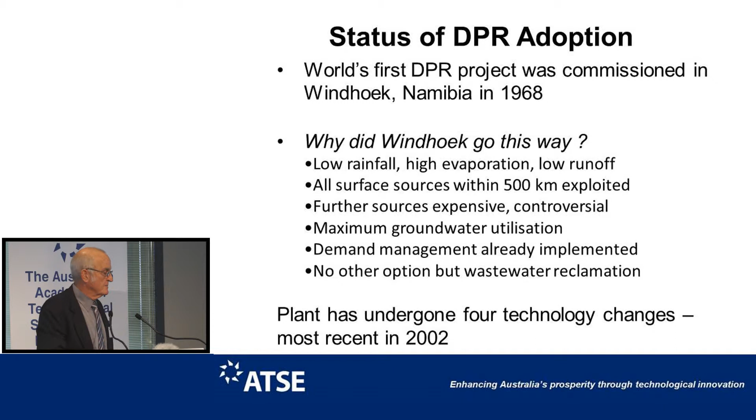As we all know, the first plant that was ever commissioned in the world called direct potable reuse was in Windhoek in Namibia in 1968. That was a fair while back. But let's put that aside and let's just have a look at why they did it. And a lot of this is going to sound very familiar to situations in part of our country. Low rainfall, high evaporation, low runoff. All surface sources within 500 k's had been exploited. Further sources were very expensive, and so it goes on.

I put it to you that those reasons why they embarked on that in 1968 apply to any of the other examples that I'm going to show you here, but it also gives good reason why, when we sit down to evaluate options for securing our supplies into the future, there's no reason why we should not consider an option that these guys did way back in 1968.

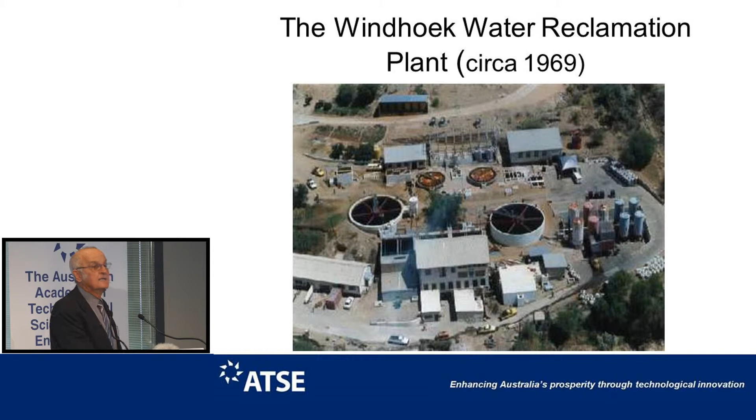I might add that since 1968, the technologies have changed. There's no way that today they would be able to use the technologies they had in 1968. That's just why it is so important we keep abreast of technologies, and why that report compiled by Stuart does address technologies that are used, and as Jörg has so eloquently put before us today, the technologies are here today, we can use them.

A pretty poor photograph of what the plant looked like in 1968. Actually a bit of a dog's breakfast, because it had just been added to in a very piecemeal fashion, but they produced a quality that complied with the standards at that time. In 2002, the new plant was commissioned with a lot of European money, operated by a European consortium, to very strict HACCP guidelines, very strict regulatory control, and has been going since that period.

As Stuart showed on his slide, it has 2 feed sources. However, we must remember that for 90% of the time, the quality coming from the dam is inferior to that coming from the wastewater treatment plant. And so it has been operating for 90% of the time on the effluent coming in from the wastewater treatment plant. That is just a function of Africa today, with people moving to live close to water supplies in a fairly uncontrolled manner.

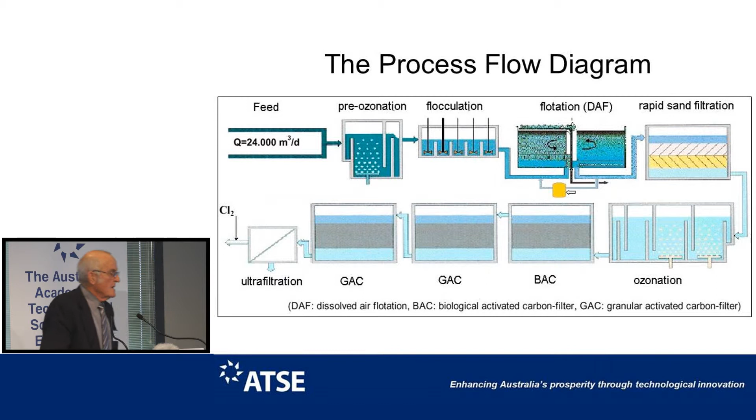There hasn't been much action in direct potable reuse since 1968, other than, of course, the Windhoek plant in 2002. But all of a sudden, there's been a real upsurge in discussion, talk, promotion. But as Carleen mentioned earlier, what has it actually achieved?

Let's look at direct potable reuse in the US. Cloudcroft, New Mexico, 2007, started up. Aurora, Colorado, 2010, started up. Big Spring, Texas, starting up. Wichita Falls, Texas, online due in 2014. Brownwood in Texas again. Why Texas? Texas is in dire straits in terms of water supply.

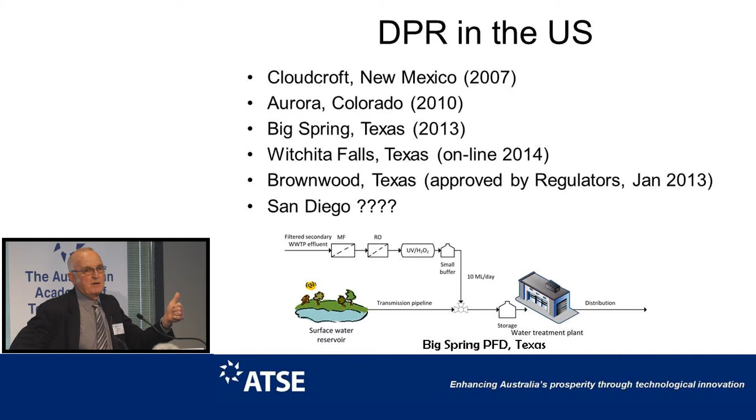And remember that in around about 1999, 2000, San Diego was going to go down the route of IPR, using exactly the same scheme that they are now currently demonstrating. And because there were council elections, the toilet to tap phrase was coined, and that's what killed it.

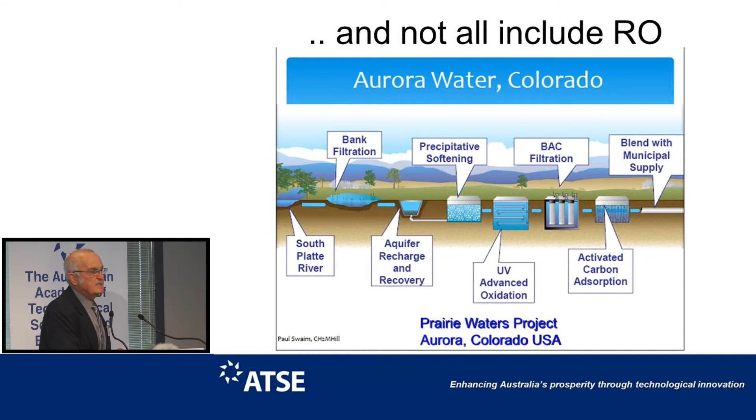Aurora in Colorado has come up with an interesting scheme. This one's been operating quietly under the radar. It doesn't have reverse osmosis. You don't have to have the high-end technology. The importance, though, is, as Jörg quite rightly mentioned, having multiple barriers of technologies that operate independently in an optimum fashion. Plus, as Stuart mentioned earlier, operators and managers who understand what this is all about.

In South Africa, yes, there has been a fair amount happening under the radar. Beaufort West in 2011, it's situated about 5 or 6 hours northeast of Cape Town in a very arid area and running out of water. What to do? They had to have a solution, and they went for the direct potable reuse route.

Durban, we've had some discussion from Stuart today on the fairly innovative way that they are managing their engineered storage basins in the direct potable reuse option. For those that don't know, Durban is a coastal city, and their water supply catchments, their raw water catchments are obviously inland. The cost of transporting effluent from the coast back there was just prohibitive. So they have looked at the direct potable reuse option.

Small coastal town, Hermanus, a very attractive place, excellent fishing. They've adopted their direct potable reuse design, and construction is to commence.

Cape Town, the mother city in South Africa, started looking at potable reuse way back in the early 80s, tried pilot studies, satisfied themselves with the performance of technologies at that time, shelved it, developed some more supplies, however, are now at a stage where they have reached a junction point. They've got a tipping point. Where do they get their water from? They've decided to go down the potable reuse option, looking at both direct and indirect, and the tenders were submitted in July 2013, and awards have still to be made.

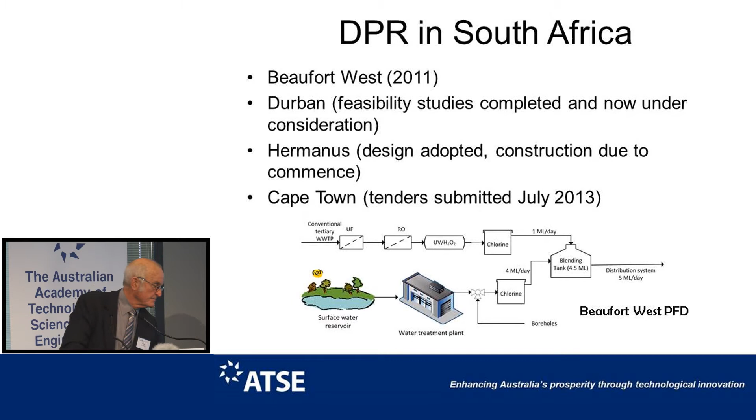In all of these, people often say to me as I go around, but you know, Windhoek, third world country, darkest Africa, really there's not a lot of community outreach, it just happens. The same comments are often made about what happens in Singapore. That's not the case here. There was a lot of community outreach in Beaufort West. They really did try and be transparent in what they were trying to do.

The interesting thing I find is that they actually called this Beaufort West New Water. And having worked with the Singaporeans, I'm sure they patented the term New Water. So maybe this is not a slide I show in Singapore. But the whole thing of transparency comes out there as well. So it's a very real exercise for them.

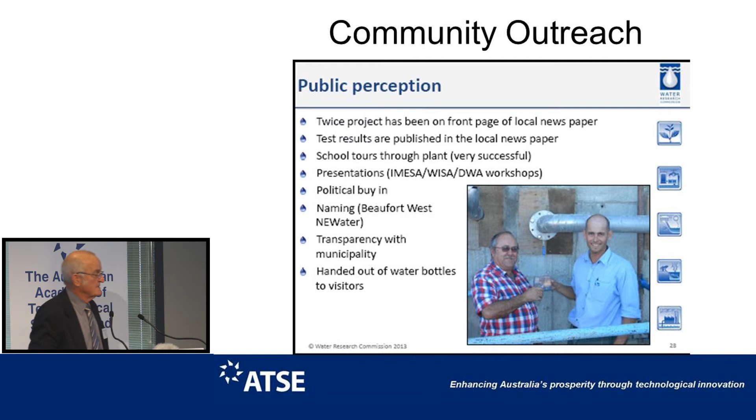India, direct potable reuse. For those that understand the rate of growth in India, the number of mega cities and growing number of mega cities in areas where there are not abundant water sources, they are looking at direct potable reuse. Two very good examples would be Delhi and Bengaluru, which is the new term for Bangalore. Direct potable reuse. Tenders are being called, they're all DBOOT projects, private sector involvement and operation, long-term operation. Tenders are being worked on at the present time and will be called in 2014-15.

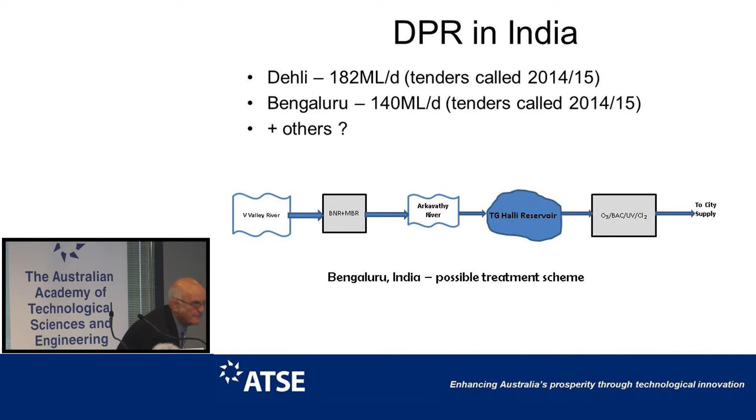Look at the treatment train at the bottom there. And that is a river which goes into a BNR plant, an MBR, which goes back into a river, then goes from there straight into a reservoir, and from there straight into an AWTP, but with no RO, with the ozone BAC option that we have a number of examples in this country of, and which forms the cornerstone of the Windhoek plant. They're going down that route. That's the design they are thinking of going out with the tenders.

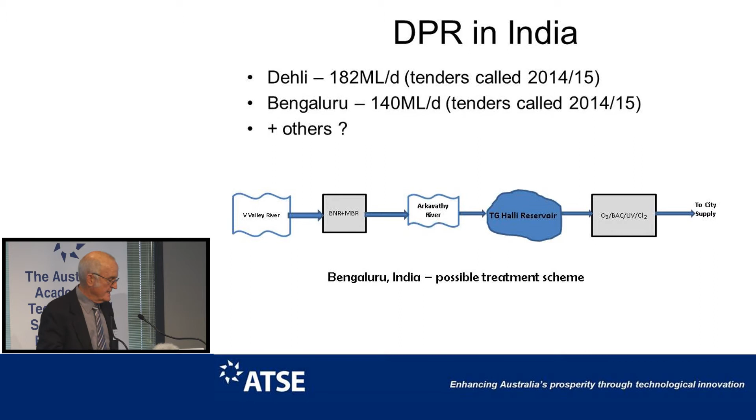We've touched on, or Stuart mentioned, the de facto or unplanned reuse, and I can remember participating in a direct potable reuse workshop at an IWA Leading Edge Technology Conference in Brisbane. I think it was 2011, with Jonathan Clement from PWN in the Netherlands, and after I sort of strutted my stuff about Windhoek and all this sort of stuff, he says, look, we've actually been doing direct potable reuse in the Netherlands for

about 50 years. We live, to coin the phrase, at the arse end of the Rhine River, and the quality of the water is seriously compromised. It's far more contaminated than today's secondary effluents. So that's their water supply. That's their raw water source.

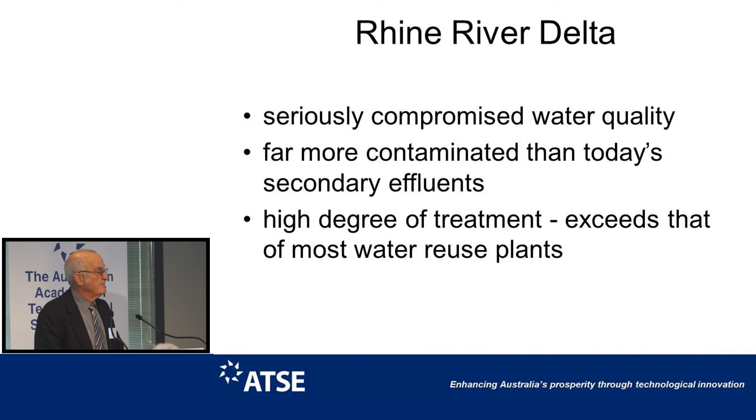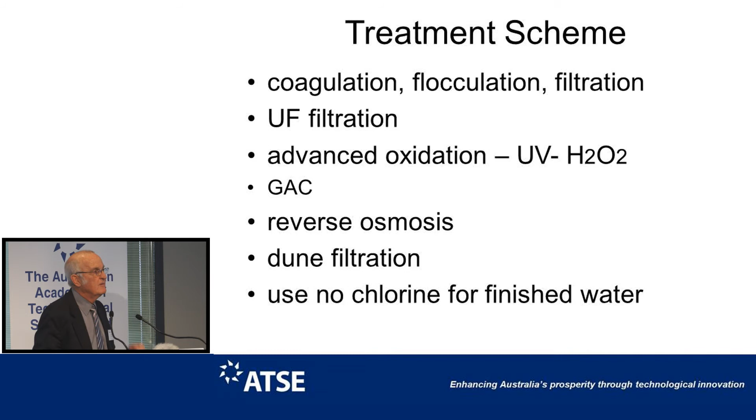They treat it with technologies that we use today in our AWTPs, be it for the Yatala Brewery, be it for the Western Corridor scheme, be it for the groundwater replenishment scheme in Orange County, be it for the new plant that's being designed or going to be designed in Perth. Same technology, because we know that it's tried and true and can work. All of those technologies are part and parcel of treatment trains that we use, and we understand, we know how to operate them. Those are the main drivers for success.

What I'd like to leave you with is that direct potable reuse is being implemented in many countries of the world, particularly those where freshwater supplies are limited on the one hand. On the other hand, their population is increasing. They've got to do something. Dual water supplies isn't going to help in the long term. There's got to be something more radical.

So I was very pleased to see the conclusion in the ATSE report, and despite what Peter said, I bit my tongue a number of times and was a very quiet observer, to see that the conclusion, which I totally support, is that DPR should be an alternative that is in the mix of options whenever we sit down to evaluate what we're going to do in the future to secure our water supplies.